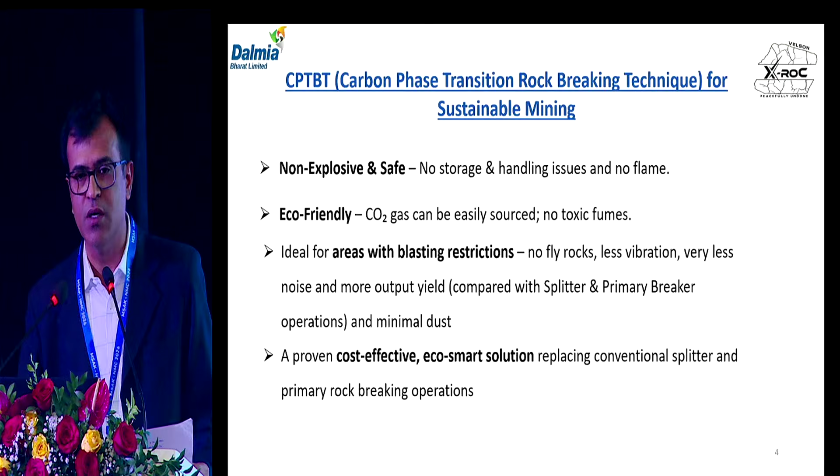So this technique offers a lot of key advantages, including enhanced safety, reduced environmental impact, precise and controlled rock fracturing. This can be used in sensitive areas like construction sites, tunnels, mines near highways, railways, wherever blasting is difficult and not permissible. So we have conducted a scientific study in Kallakudi limestone mines. Why we chose Kallakudi limestone mines? Because this mine is situated near National Highway 81, and there are a lot of villages surrounding the mine. So along with our CIMFR team, we have done this scientific study in Kallakudi mines.

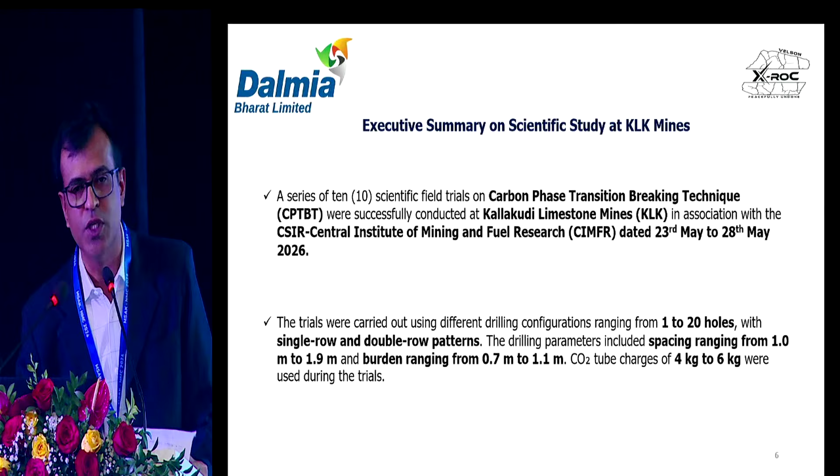We have conducted a series of 10 trials. They arrived on 23rd May to 28th May. During this study, we conducted different configuration parameters, including drilling: single row pattern, double row pattern, with holes ranging from 1 hole to 20 holes. The spacing ranged from 1 meter to 1.9 meter, and the burden ranged from 0.7 to 1.1 meter. The CO2 filled in each tube ranges from 4 kg to 6 kg. This principle will be later explained by my accompanying Mr. Raghuram.

So the ground vibration: normally when we do conventional blasting, we measure one or two ground vibrations with the monitor. But our CIMFR team installed around 7 monitoring stations in all directions, including top and bottom of the face. The peak particle velocity at 150 meters is 0.783 mm per second. For the distance 25 meters to 50 meters, the PPV is less than 5 mm per second, which is the safe limit.

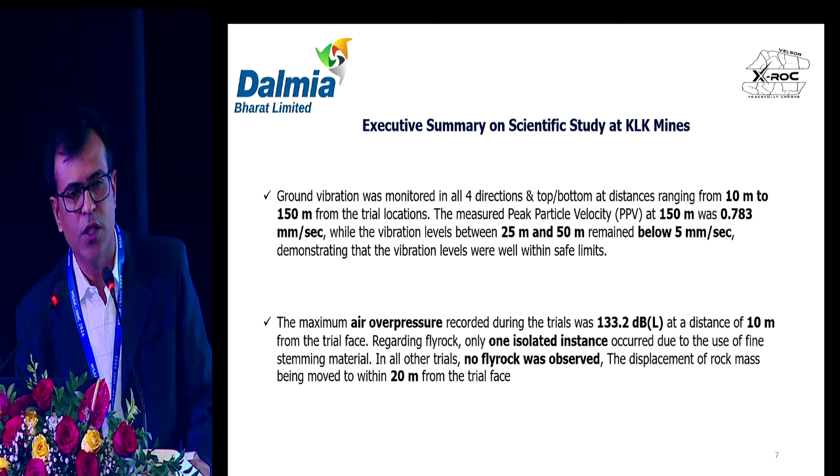And the air overpressure during the trials was a maximum of 133.2 decibels at a distance of 10 meters from the trial face. There was not much fly rock observed, but in one trial there was fly rock, because we conducted the worst scenarios in all the trials. So displacement from the trial face is 10 to 20 meters only. The rock which moved from the face is maximum 20 meters only.

So we have conducted the CO2 concentration analysis also. After the trial, 8 to 20 minutes, the range was 0.01% to 0.42% during the trials. There was no oxygen deficiency all along the faces. So based on this observation and monitoring data, the scientific analysis carried out by CIMFR shows it is very safe and can be implemented in all the mines with sensitive areas.

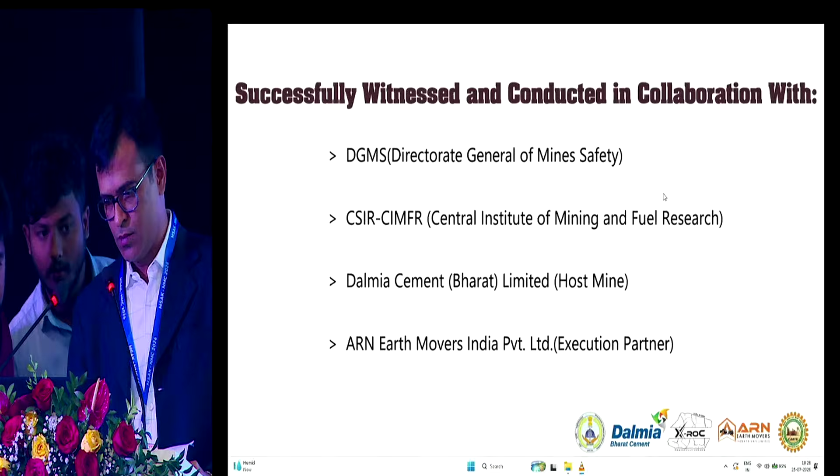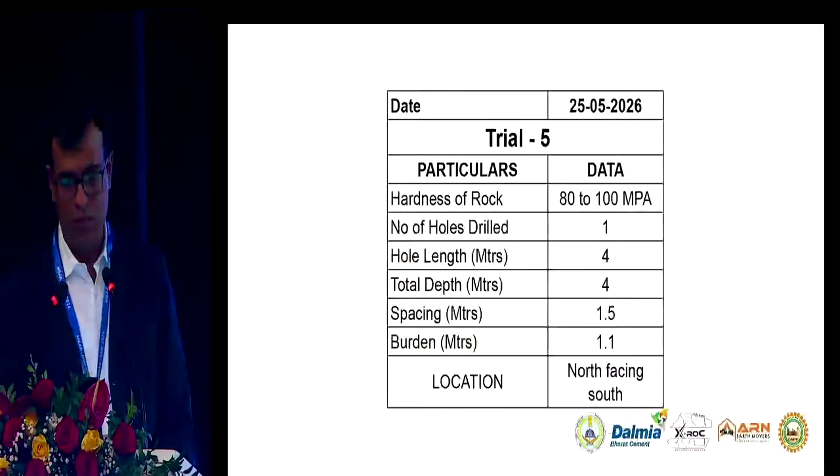India's mining sector is transitioning toward a safer, more sustainable future. For the first time in the nation's history, the carbon phase transition rock breaking technique, CPTBT... Greetings from Velson X-ROC. India's mining sector is transitioning toward a... A comprehensive series of 10 rigorous trials was executed, ensuring operational safety and performance criteria. Conducted at the Kallakudi limestone mines at Dalmiapuram, Tamil Nadu, under the evaluation and presence of DGMS and CSIR Central Institute of Mining and Fuel Research scientists. This milestone initiative was made possible through the strategic collaboration of Dalmia Cement Bharat Limited, DGMS, Central Institute of Mining and Fuel Research, and ARN Earth Movers India Private Limited. As mining boundaries advance, CPTBT stands as the ultimate non-explosive solution to eliminating fly rock and ground vibration risks. Velson X-ROC is proud to spearhead this sustainable leap toward absolute mining safety in the country. Special thanks to Directorate General of Mines Safety, DGMS, CSIR Central Institute of Mining and Fuel Research, CIMFR, Dalmia Cements, and ARN Earth Movers India Private Limited.

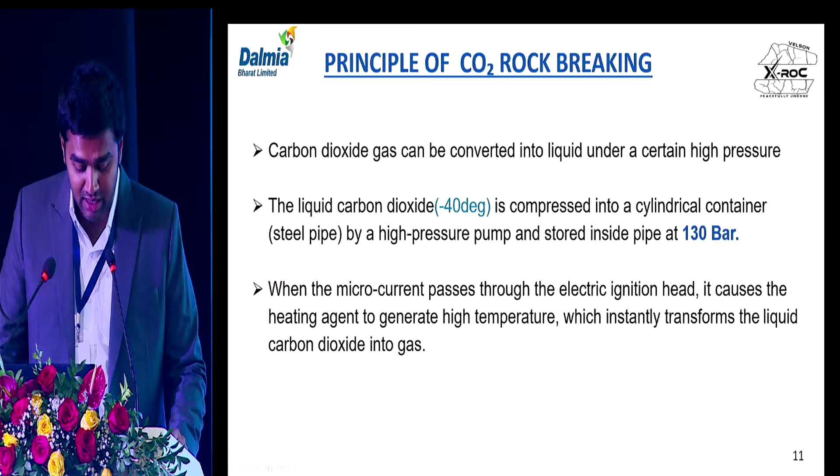So the basic principle of how CO2 breaking works is through liquid carbon dioxide. At its heart, the carbon phase transition rock breaking technique revolves around one simple motto: harnessing the power of CO2 phase transition to break rocks silently and sustainably. First, the liquid carbon dioxide, at around minus 40 degrees Celsius, is compressed into a high-strength cylindrical steel pipe from a storage cylinder. The steel pipe is made of 42 grade chromium, molybdenum, manganese, and other alloys.

Inside the pipe sits a heating element. The heating element acts as an initiator, which initiates the phase change of carbon dioxide from liquid form into gaseous form. During this transition, an enormous amount of pressure is released, along with a cracking mechanism that we use to break the rocks.

The liquid CO2 is filled inside the steel pipes at around 130 bar, which is otherwise 13 megapascal, through a reciprocating pump, especially for filling this liquid carbon dioxide.

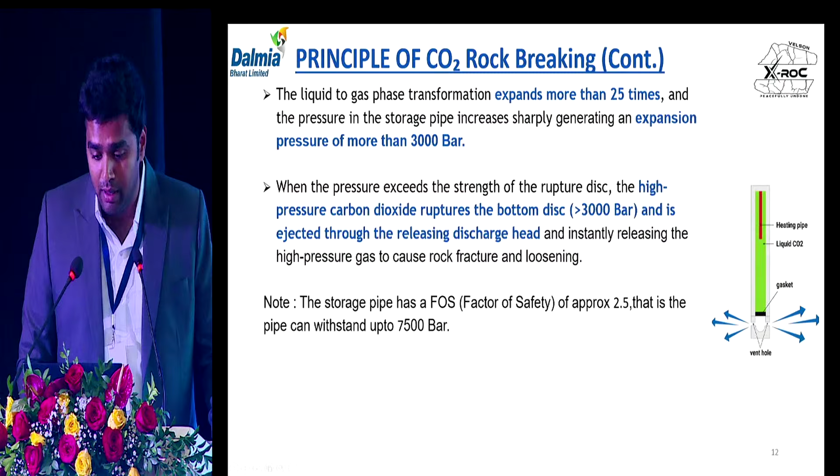So the factor of safety of the steel pipe is 2.5 times, that it can withstand 7,500 bar, whereas your breaking mechanism just requires 3,000 bar. And the process stages involved in CPTBT. As in other processes, likewise for normal blasting, you drill the holes. The drilling hole is around 140 mm and you fill the carbon dioxide into the steel pipes. Usually, as Mr. Johnson already mentioned, each pipe can accommodate around 4 kgs to 6 kgs of liquid CO2.

And then transport the pipe to the mining bench or the mining area where you need to have this process started. And you insert the pipes into each of the holes, either in a straight line pattern or a staggered pattern. And then you have to do stemming as you do it in other blasting cultures and connect in series form. And then we initiate the process for phase transition.

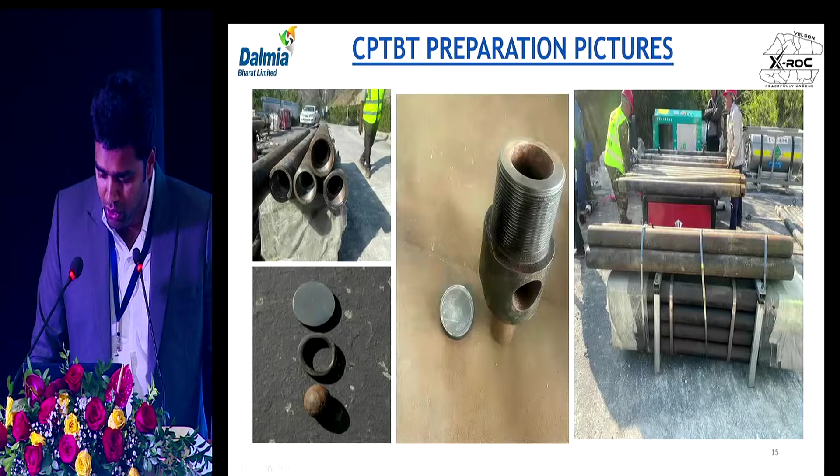These are some of the images that we have got here. The steel pipe, as I mentioned, has a thickness of around 20 mm, and the rupture disc has a thickness of around 10 mm, which is of mild steel. And to your right, you can see the heating pipe that initiates this entire process of phase change from liquid to gaseous form.

These are some of the photos that we took during the preparation and execution of this trial. So the preparation shed is where you prepare all the steel pipes and you fill the CO2 into it and repair the pipes in case it's bent or needs some repairing works.

And the technical and operational specifications consist of the entire kit, not only the steel pipes and the initiator, but also liquid storage tank, liquid carbon dioxide filling machine, which is a reciprocating pump, as I already mentioned, and a table, rock breaking pipes, heating pipes, air compressor and wrench to tighten both the ends of the pipe after everything is inserted and ready for filling. And you also have multimeter initiator and also a pipe straightener where you can straighten the pipe in case during the recovery the pipe is prone to some damages.

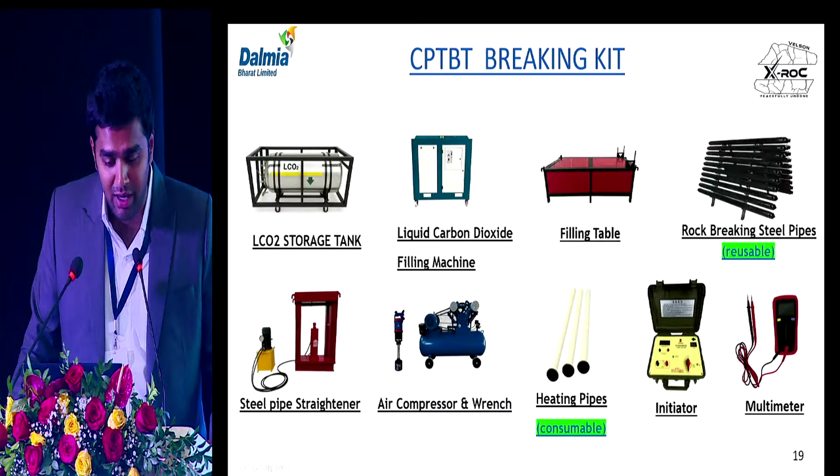And this is with respect to how much is the fuel emission and how much is the production output that you get when compared to primary rock breaking, especially the study that we have taken in Dalmia Cements Bharat Limited, Tamil Nadu. So putting all the numbers together, we came across 43% of fuel savings, and the reason as to why we have the savings here is through the breakers. The amount of breakers that you use when compared to a primary breaking or a splitter breaking is significantly reduced here because the initial fissures on the rock are already being created through this CPTBT technique.

And when compared to CO2, as it's directly proportional to the machineries involved, we have 39% less CO2 when compared to the primary breaking and splitter operations to extract the rock. Which means it also saved 2 tons of CO2 every day for 3,000 tons of rock processed.

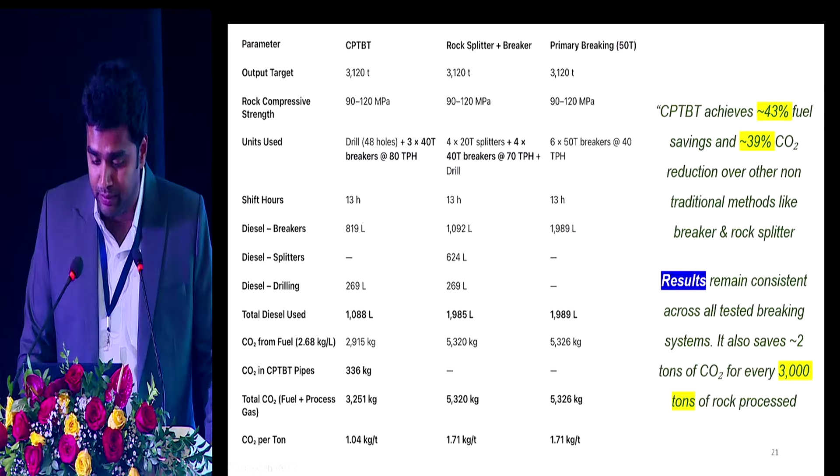We have also collaborated with CIMFR under the aegis of DGMS. From CIMFR, we have had around 7 scientists visiting Dalmia Cements Bharat Limited, and through rigorous trials and brainstorming sessions we had with them, we had to put the pipes and trials in a very extensive manner in such a way that extreme conditions have been accounted for. So this marks India's first scientific study combined with CIMFR under the aegis of DGMS, and we are also awaiting the report from CIMFR as of now.

So this transitions as a new mining method as long as we need to have mining done in very sensitive areas, especially near to habitations and infrastructures.

So this technology has already been implemented, trialed and tested in Dalmia Cements Bharat Limited, and it's been found successful there. And also in terms of volume, in terms of safety, and in terms of other parameters that they needed, it was found suitable and safe there.

And we are awaiting a report from CIMFR, after which I take this opportunity to express our deepest gratitude and respect to the Directorate General of Mines Safety. We are immensely thankful to the DGMS for granting us a trial study for this novel technique for the first time in the country, done in association with Dalmia Cements Bharat Limited. And I also wish to thank Dalmia Cements for providing us a platform at their mines for this maiden technique and to do an extensive study with all the facilities in their mines.

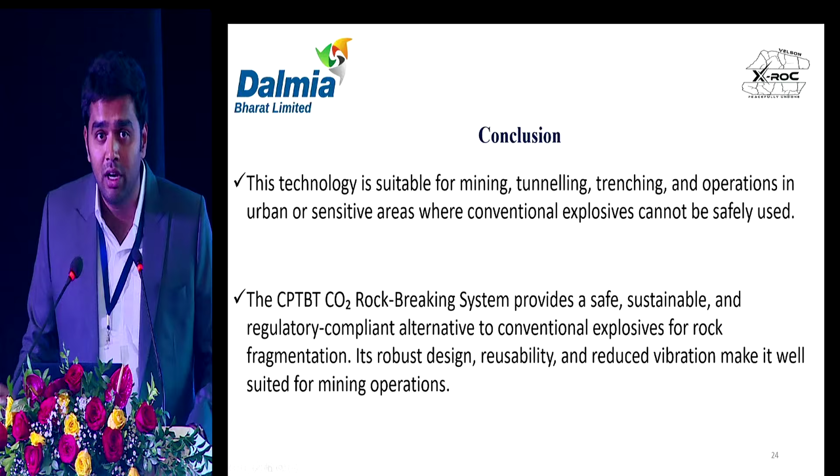This is all I've got for today, and thank you very much. Open to the conclave for any questions or discussions. Thank you, Raghuram. This is a new technology introduced, I think. Yeah. And if there are any questions, we can take one or two. Sorry, sir?

What is the safe distance, sir? Normally, when you undertake blasting, what is the safe distance you can assure for human habitation or roads or other things? So when it comes to vibration, within 50 to 100 meters, CIMFR scientists have recorded a vibration of 3.5 to 4 millimeters per second. So up to 100 meters, below 100 meters, we can do. Absolutely, sir. Safely. Right. That is the main motto of this.

And what is the fly rock distance, how much? So fly rock distance, as you have seen on the video, we have done only with the extreme conditions possible because we have reduced the burden and spacing. Okay, with that condition, what is it? 10 meters, sir. 10 to 20 meters is what we observed, towards the front face. Very good, very good. Thank you, thank you.

What is the commercial viability compared to conventional explosives in the present scenario? Sir, absolutely. When compared to conventional explosives, this is going to be more expensive, because the cheapest option right now is commercial explosives. But this is going to be used only in very sensitive areas. I understand, where fly rock control is required. Yeah, absolutely. Maybe how many times the commercial, twice or thrice? It should be 20% more from what we studied. 20% more. Okay, that's fine. Yes.

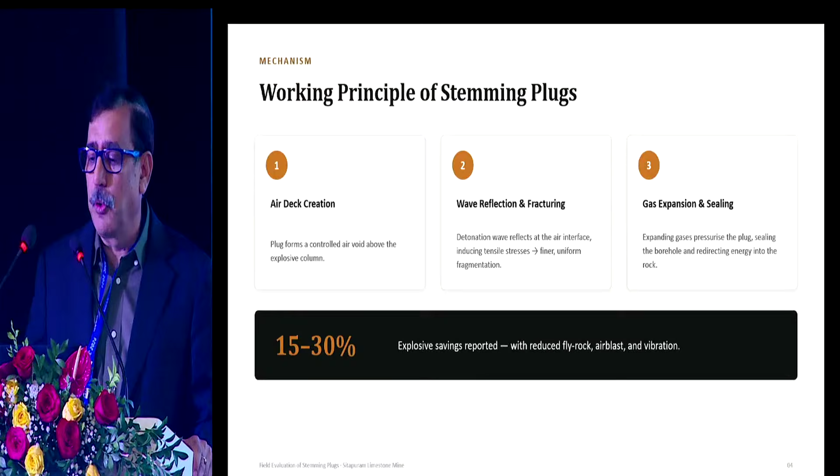The working principle is very simple. You create an air deck, and because you are creating an air deck, the compressive wave which is formed when you detonate explosives gets reflected and becomes a tension wave, and most of the rocks are poor in tension compared to compression, so the fragmentation improves and gas expansion happens, and this gas results in better fragmentation.

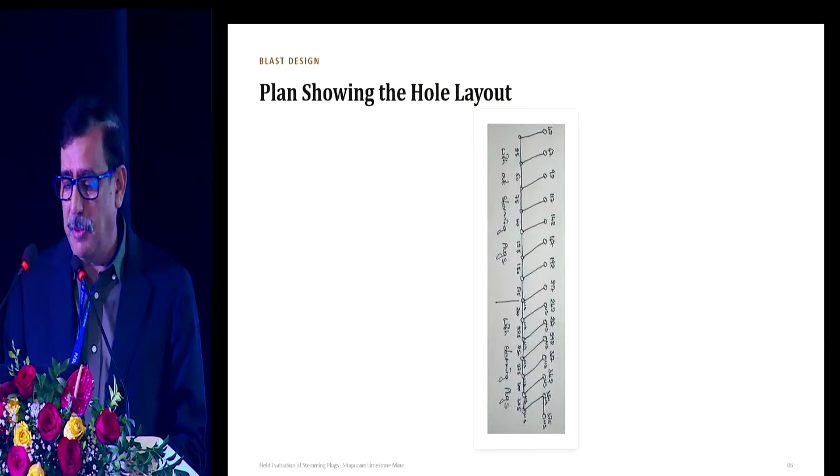So this is one of the case studies where we tried in Sitapuram mine of Zuari Cements Limited. This is in Suryapet district of Telangana. I'm sorry for this. So half the face we drilled and blasted with what we normally used, and in half the face we used stemming plugs. So this is how stemming plugs are used. We created an air deck of around 1 meter. Just put the stemming plug on the top, insert it through a stemming pole, and that's it.

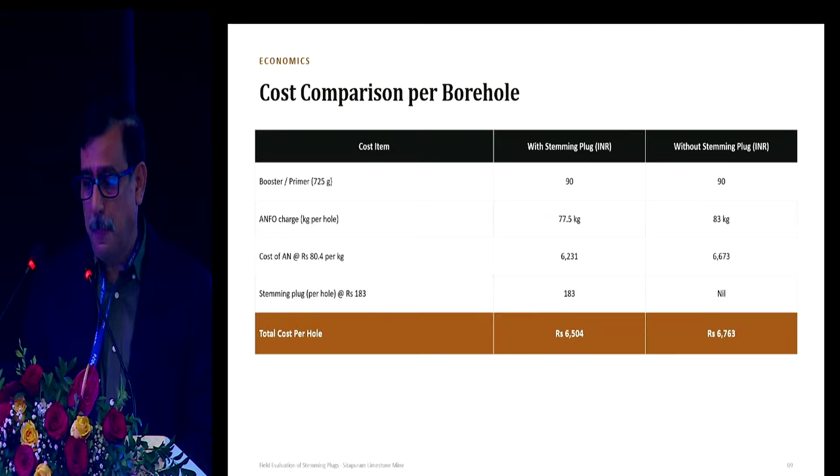As far as cost is concerned, the stemming plug cost around 183 rupees. We found that per hole, we have saved some money, resulting in a saving of, assuming a density of 2.5, around 1 rupee 47 paisa per cubic meter, and at a density of 2.5 grams per cc, around 0.59 rupees per ton.

And this is accompanied with good throw, good fragmentation. These are the primary readings. We have started selling this product, trying it only in the last 2-3 months, and we feel, and research also proves, that there is scope for saving up to 30%. But here, the saving is around 10%.

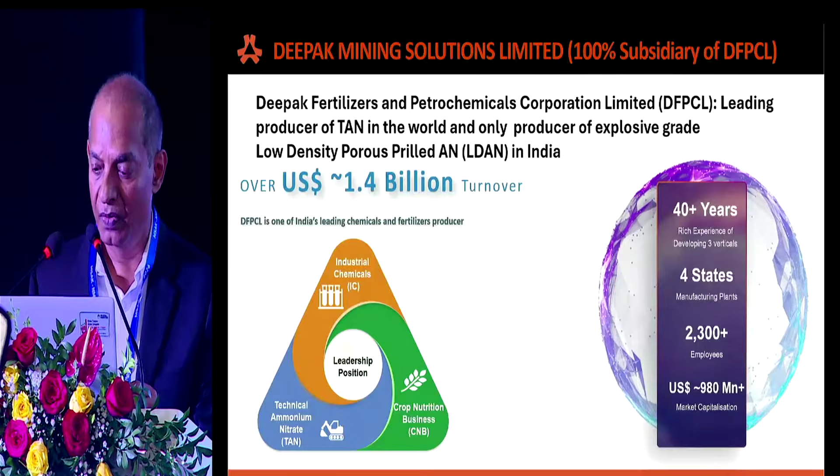The uniqueness of our company is we are also offering solutions. We believe in hand holding. We just don't supply product. We want to stand by, join hands, identify the issues a mining company has, and then work together, collaborate with them, and try to resolve the issues, share the details, share the technology and the experience with them. And the end goal is definitely production improvement, productivity improvement.

So you can see the entire chain here at the top. We all know that in any mining there are two main activities, upstream and downstream. Upstream activities mean the main two activities are drilling and blasting. Under downstream, the rest of the activity comes: load and haul, crushing, and then beneficiation and other things come after that. So the left picture shows the tools, the technology, the things we do to control these two activities, drilling and blasting. We have the expertise and full control on these two activities. The impact of these upstream activities on downstream activities is huge. We'll show you in the next slide a comparative of the percentage, the cost involved there in the entire value chain.

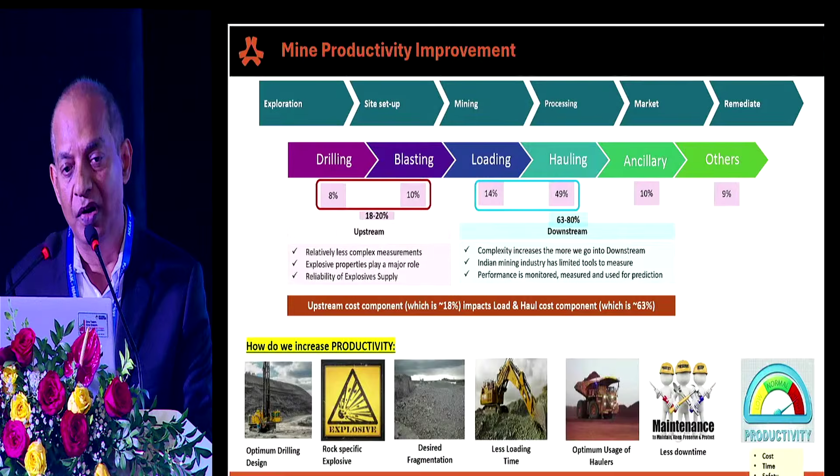We can optimize drilling design, use rock-specific explosive loading, and design charging rules based on that. By doing other things like timing, and using some AI tools for prediction, we can see the downstream improvement. We can also track that and show you the results. We'll talk about more details in a couple of the next slides.

A little bit on ANFO, it's nothing new, we all know, we are all mining engineers, we understand what ANFO is. The benefits are we can produce a higher powder factor, lower the cost, and improve the drill yield. Because of the gas energy, we can have better fragmentation. Because of the lower density, we can have better control on vibration. And because of the lower density too, the charge distribution in the hole is better than any other explosives, which results in better fragmentation.

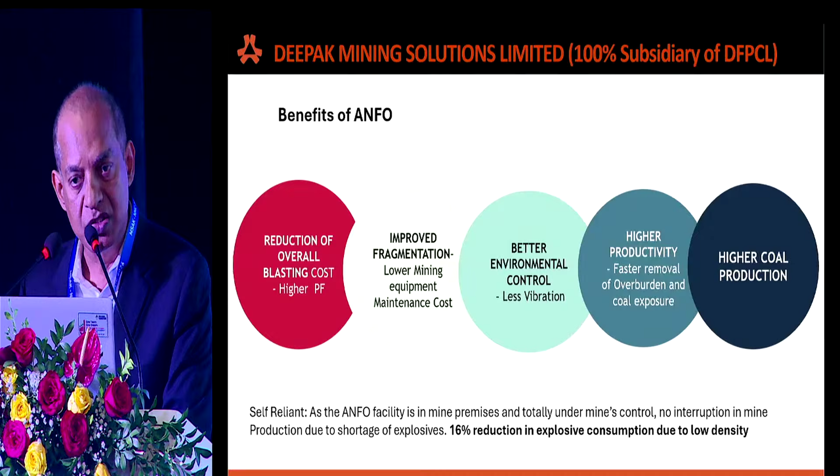For any blasting, there are two or three variables that are very important: the charge distribution, the confinement, and the bench geometry, along with all the QA/QC work. It helps if you use the lower density product, because for the same kilograms put into the hole, the charge distribution gets better.

This is one of the case studies I'm going to share with you. A very interesting site - one of the Ultratech cement limestone mines had some issues. The top benches were producing a lot of boulders, while at the same time the bottom benches were overblasted, producing more fines. So they had issues to control because of the overblasting. There was also an issue of ore dilution, which was causing a lot of time invested in segregating the ore and was affecting the overall productivity of the mine site. That was the main issue.

Our team got engaged with them and worked with them. We spent some time identifying their practices and then did some trials with their consent. We made recommendations to change the design parameters, using AI-based software to simulate the blasting scenarios by changing the design parameters. We were able to control the dilution and improve productivity by 32%. We'll show you in the next slide.

So that's what we did there - we improved the powder factor, and the drilling and blasting cost was also optimized. Ore dilution was controlled by doing all this exercise. We call it TCO, total cost of ownership. The concept is about controlling some of the key activities and evaluating the impact of that throughout the value chain.

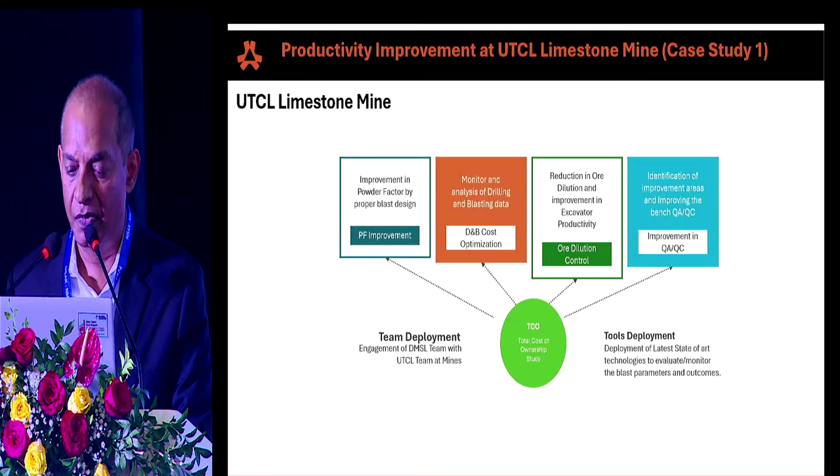So when they were blasting, the ore was getting mixed with the other material due to rock and material movement. The excavator was spending hours segregating that material before loading it into the dumpers to save the grade. By doing simulations, changing design parameters, and predicting the movement and throw of the blast, we were able to control the material movement and successfully segregate the material during the blast.

So you can see the muck pile was separated during the blast, and that helped improve the tons per hour of the excavator, because they were able to send the excavator right up to the high grade, and the material was filled into the dumper in very little time.

You can see the dumper fill time also improved, almost 30% time improvement there, and 16% productivity improvement by doing the optimized blast.

The idea is to explain that there is technology available in the market, in the industry. All we have to do is give it a try. I know the potential is there in our country. We have the smartest engineers in the world, I can tell you that.

But what I found is a little bit of a gap in the adoption of digitalization. I think it's happening, the concern is only the pace of that. It's not very fast, it has a lot of scope to improve. The Prime Minister's vision of an advanced country by 2047 is not too far, so we have to work now and decide how we can improve productivity by adopting technology.

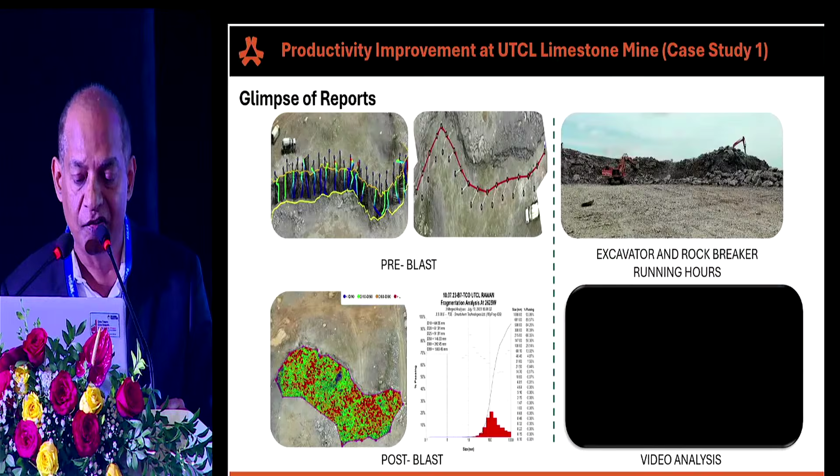So it's the same, more detailed information about drill yield improvement, powder factor improvement. Rock breaker hours were also reduced by reducing the boulder size. That's another exercise, a case study.

It's a very prestigious one, Navi Mumbai, the new international airport. We were also part of that development, and there was a lot of challenge. There was a deadline to achieve the material of spec size because they were using that material to do some construction work at the buildings nearby.

And the challenge was there was a limitation on vibration control because there was infrastructure close by, within 110 meters. The PPV restriction was to produce not more than 22 millimeters per second. Fragmentation to the spec was required, and fly rock was also a concern.

So we collaborated with the management, the local management there, and worked together, and with all the help of experience, knowledge, and technology, we were able to achieve the results.

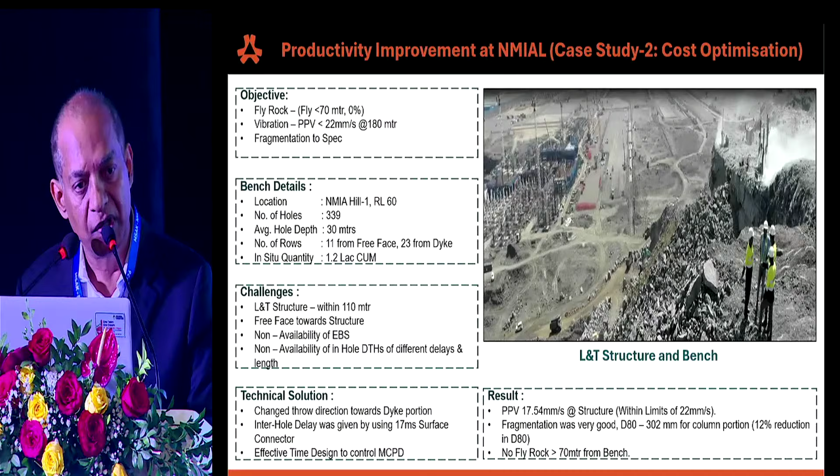The PPV was 17.5 millimeters per second at the structure where the point of concern was. Fragmentation improved by 12%. Oversize material was reduced by 12%. And fly rock was not beyond 70 meters, where the structure was located. So this is another study we did there.

Now we come to the actual topic. I did not want to spend much time on this because we all know it, it's available on the internet, everyone knows that. What is smart mining? What are the options there? So I will go quickly through those options and we'll discuss the challenges we have.

In layman's language, smart mining is just an intelligent connection between the physical data which is captured and stored in the field on the equipment, and that can be transferred with cloud-based technology to the offices, and the dashboard can be analyzed using industrial Internet of Things. That's the basic concept, but there's a lot of detail.

If you want to know more about it, feel free to connect with me, we'll explain more. Just a little bit of importance.

It enhances safety. I will go through the main points because of time crunch. I think safety can be enhanced by use of technology, by using remote drills, automated trucks. Operational efficiency can be improved by using this technology. It's more sustainable, it optimizes resource use and emission tracking to meet environmental regulations at the same time.

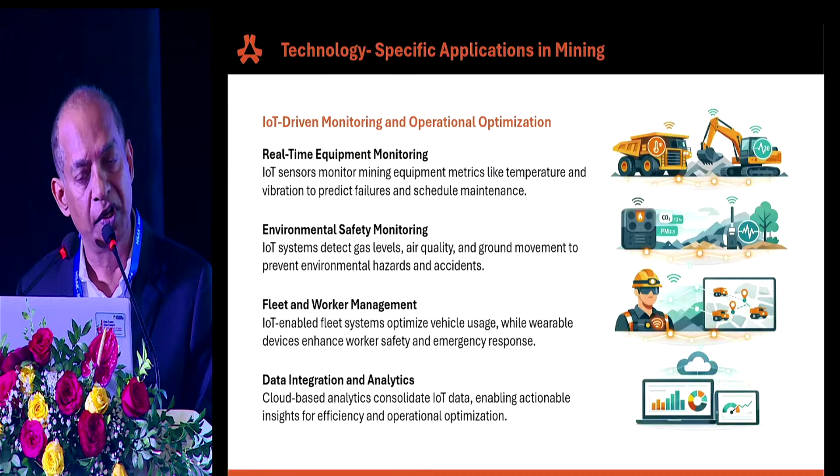Mining produces huge data every day. So data management is also a big challenge for any mining industry. But that can also be handled very accurately, very fast with the help of these technologies. It can also predict maintenance, a very important role for equipment, knowing the equipment downtime in advance. By doing predictive, preventive maintenance, you need to know when it is going to need maintenance. So you can predict the maintenance by monitoring the behavior of those equipments by installing some sensors.

And it can directly transfer the stress created on the equipment. So you can watch that, you can simulate the conditions and find out when it's going to fail, and you can take action.

Other AI-driven process optimization: intelligent control systems optimize mineral processing parameters. That's another application to the mining industry. NLP streamlines the administrative tasks, like text messages and audio messages can be directly converted into actionable items using NLP.

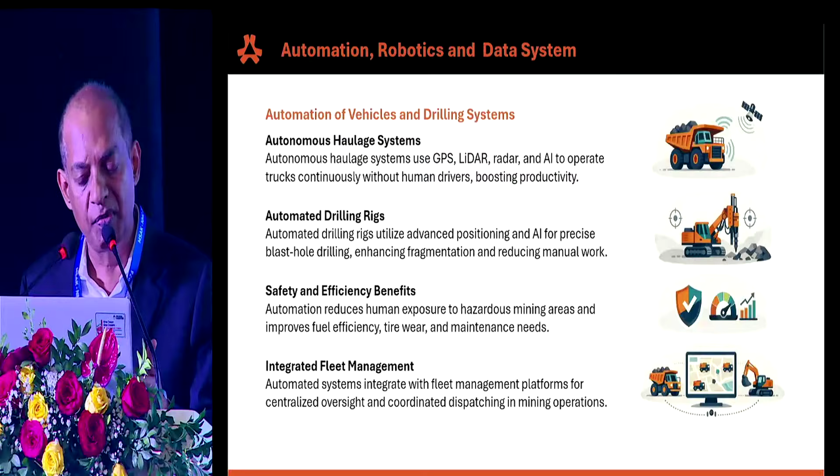Robotics are also getting attention nowadays, and companies are trying to use them in dangerous zones for inspection of the areas. The robots go there, take pictures, come back and provide the information, which can be analyzed in software. So that can be used for inspection.

Aerial drone surveys are very common. We are also doing it, but you can fly drones in inaccessible areas, get all the images, monitor the dump movement, monitor the wall movement, all those things can be done. Automated sampling and maintenance can also be done by robotics. Emergency response: remotely operated robots can address emergency situations. If a fall happens, we can send the robot to rescue the worker and do other things needed.

Comprehensive data collection can be done with the help of technology.

Sanjeev Kumar, another 2 minutes, please.

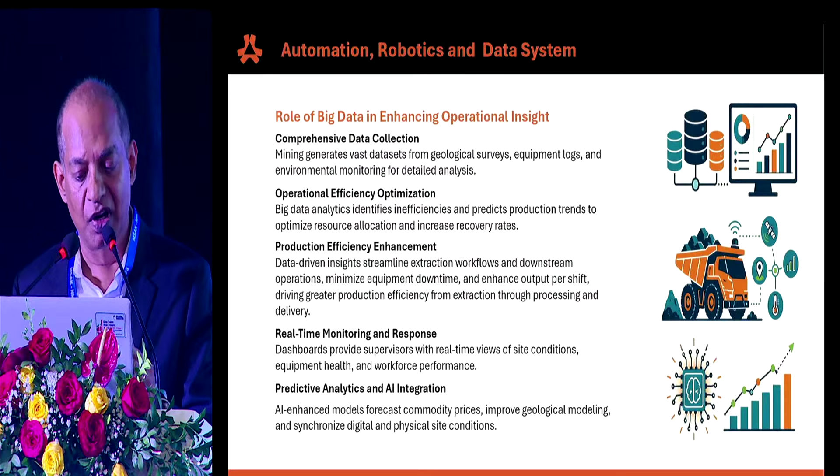Sorry, we'll finish soon. Operational efficiency optimization, production efficiency, real-time monitoring and response. Quickly, we go to the challenges. The big challenge is the high initial capital investment. That is definitely a challenge. But if there is an option, I don't know if the government can support that by giving some loans at low or zero interest for a couple of years, so the mining industry can use that money and invest it.

Because sometimes it's difficult to know the ROI, there is no clarity on the return on investment in the beginning. It will pay for itself in a couple of years, but it depends how much you want to spend. Another option is we can do some trials. You don't have to buy the whole technology, but you can do it in parts and see the results to justify the investment and then go for a bigger investment.

Limited digital infrastructure is another challenge. We don't have a robust network. I think we have to build that so that all this technology can work. The mine sites are remotely located, so that's one of the challenges. Workforce skill gaps are there.

We have to train our people, make them aware of the value, and there is a psychological fear of losing jobs by doing this. But I think we should use it as a tool. It cannot replace the human brain, the decision making. It can only speed up your processing. You can improve the accuracy. So there is that fear. We have to just overcome that and prepare our people to adopt and use it.

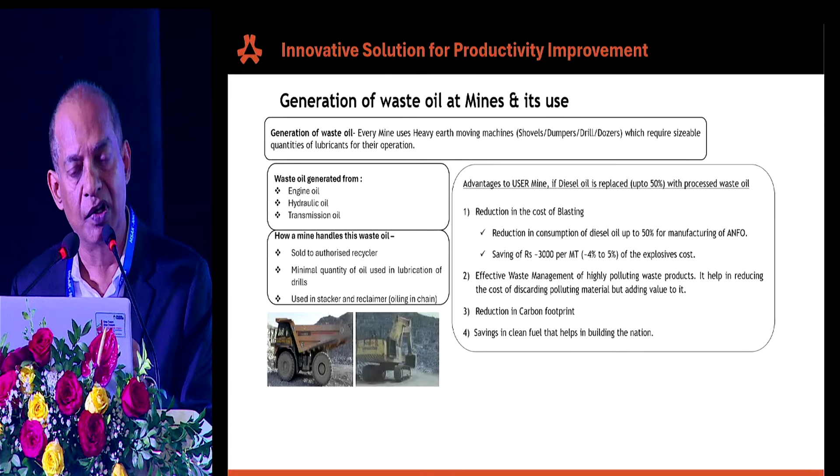So this machine has two chambers. The used oil can be mixed with the fresh diesel, and it's usable to produce the required energy in the ANFO.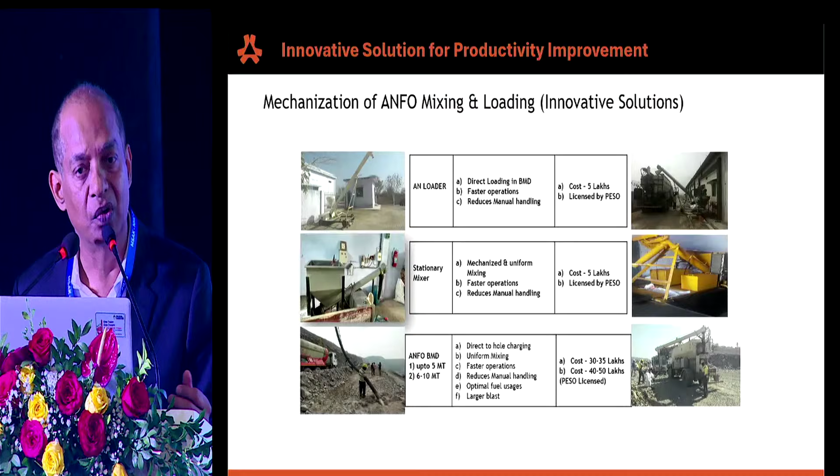Some of the other things we can provide: the AN loaders can help to speed up the loading process into the BMD. A stationary mixer will also help, and we provide our explosive truck so that the ANFO can be directly charged into the holes.

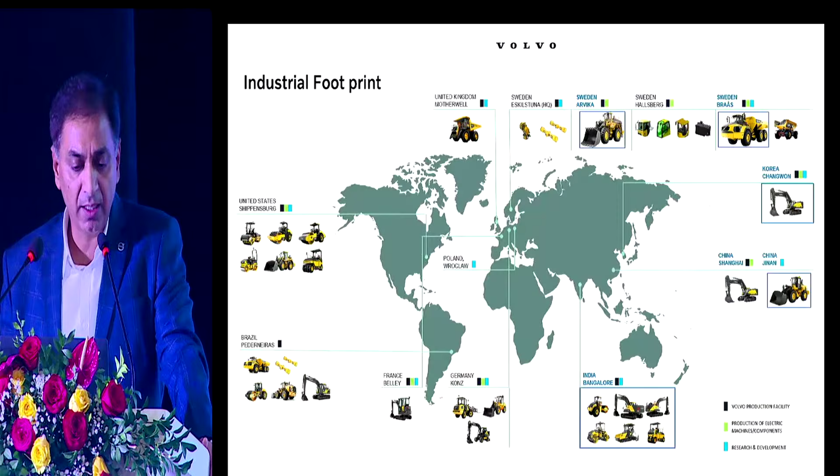So that was a very small glimpse of the fact that we care about safety when it comes to any construction or mining sites. This is the industrial footprint that we have across the globe. And of course, Bangalore in India is one of them. We have a large production facility here for excavators, a facility for Volvo trucks, and a facility for Volvo buses.

And we are proud to say that Bangalore, India is also one of the key R&D centers for the Volvo Group. And we are expanding soon. We are doubling our capacity in the next 2 to 3 years. This is where we do our manufacturing. We started India operations, as I said, in the latter half of the previous century.

And we also heard about people talking about operator trainings and things like that. We have invested in a world-class facility, which we call the Volvo Construction Equipment Customer Center. This facility is in Hoskote in Bangalore. And we do a lot of trainings. We have invested in simulators here. We have a simulator on wheels, which we take to the sites. That is more about getting hands-on for the operators and talking more about safety and things like that.

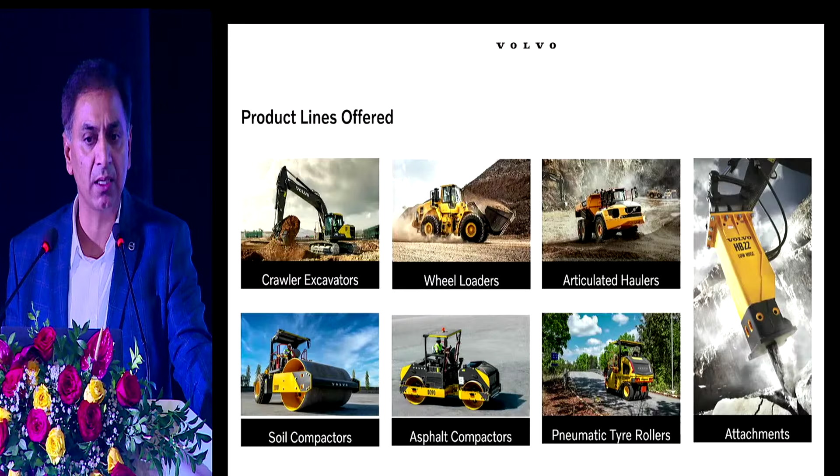This is our presence in India. We have 18 to 20,000 machines currently working in the country. I'm talking about the machines, not the trucks as of now. We have 21 domestic dealers and as many as 1,100 service and salesmen across the country through our dealerships. And the product lines that we offer in the country today range from excavators to wheel loaders, artic haulers, and road making machinery, including the attachments and the special application solutions that we offer on these machines as the base carriers.

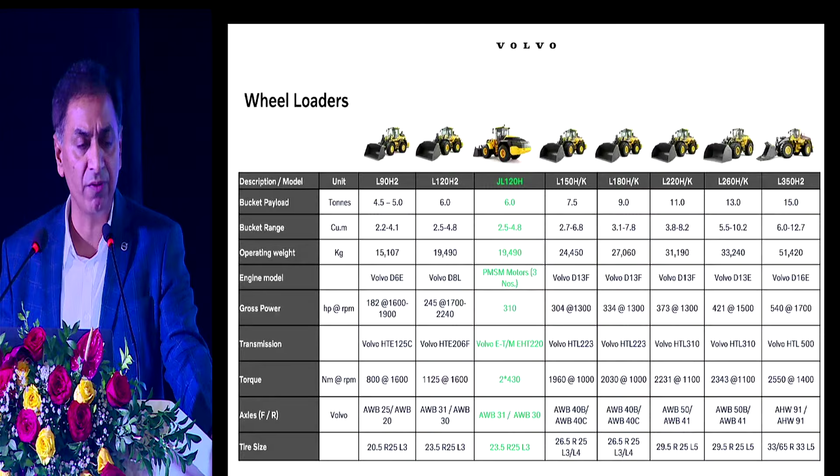When it comes to excavators, what we offer to the country today is from 20-ton to 90-ton excavators, which are used primarily in construction, heavy infrastructure, or mining applications. When it comes to wheel loaders, we are there from the 4-ton to the 15-ton wheel loaders, be it face loading or rehandling of materials. And in the mining segment, when it comes to this range of equipment, we lead in this country.

Of course, contractors are our largest buyers, but we also deal with Coal India subsidiaries, where we have supplied a lot of this equipment. And these are the articulated haulers, from 25 to 55 tons is what we provide. In the next slides, my colleague Deepak will be briefing you on the technology.

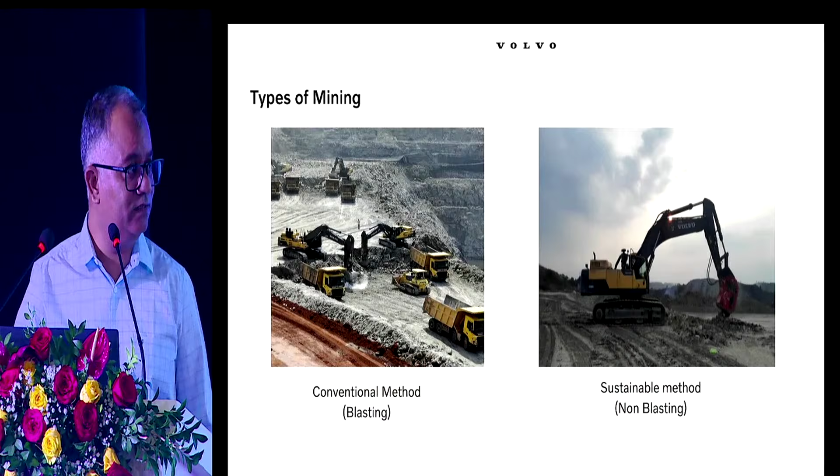Good morning, everyone, once again. I will not take much time. My friends have already explained the types of mining in the previous presentations: conventional and sustainable mining, blasting and non-blasting. For non-blasting, if you see the customer challenges: blasting restrictions, safety risks and vibrations, noise complaints, environmental challenges, and mining closer to habitats or national highways, as explained by my friends.

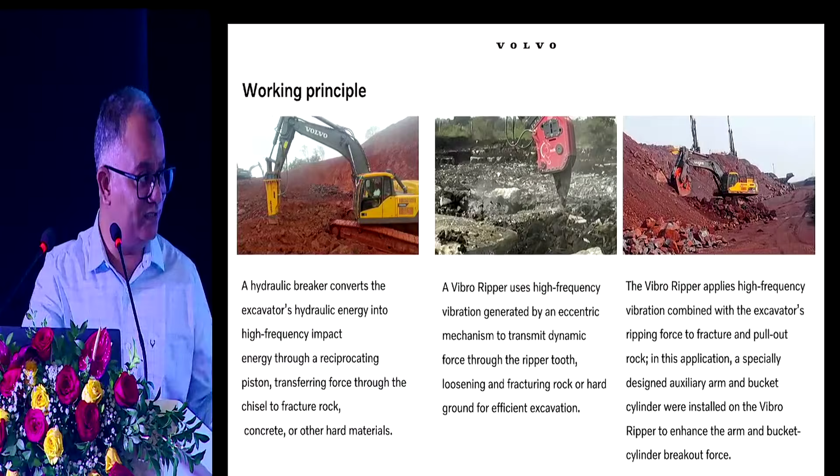The current solutions available in the market are a breaker, a vibro ripper, and the one which we have worked out is the BRMC 85. That's the brand which we are taking forward. Coming to the working principle of these three different solutions, I will not go through the text, I will just run the video. You can hear the sound of the breaker, but the vibro ripper you can hardly hear. It works at around 50 decibels or less, so you can operate near offices or in housing complexes too, apart from mining.

Now, suggested applications for this solution, because we have multiple solutions. How do you select which attachment or solution is applicable for you? Based on the RQI, the rock quality index, you can easily select which attachment is good for your site.

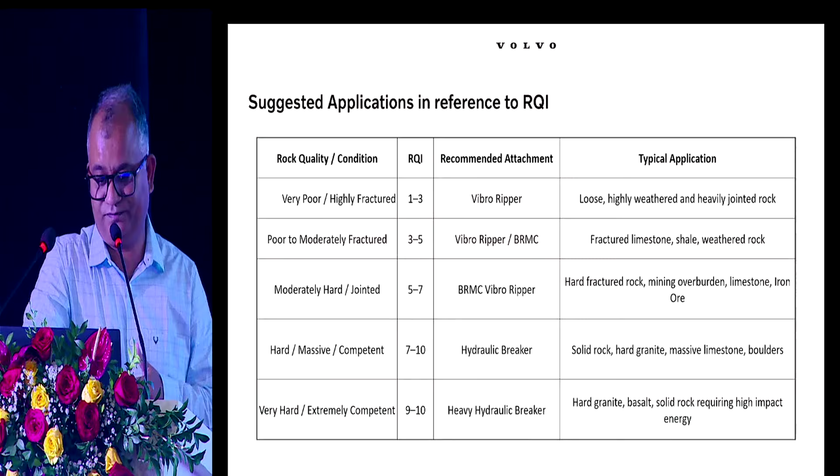The BRMC 85 is actually a combination of a vibro ripper and a specially designed arm, which gives roughly 56% higher ripping force compared to the standard ripper. We have fitted an 85-ton class vibro ripper on a 50-ton class excavator, which gives us a lot of advantage. It is working in one of the iron ore mines in the eastern part of India, which we'll talk about in the coming slide.

So how is it creating value for customers? Its high frequency vibration fractures rock, so no explosives are required. It's a continuous operation, no need to stop the mining operations; currently it is working in continuous shifts. For the customer, it means safe operations near urban and sensitive zones, low noise and minimal ground vibration, and minimal effect on the mineral quality.

And on fuel consumption, as I mentioned, we have developed this attachment for a 50-ton class excavator, so we are able to save a lot of fuel compared to 85-ton class excavators, which further results in a low cost per ton.

Just to update you on the site where it is working in Tata Steel Joda East iron ore mines. So it has crossed around 1,800 hours, and it is very well appreciated by Tata Steel as well as the other contractors who have visited this site. So some of the data which I will talk about on the productivity: it is giving 200 to 250 TPH, with a fuel consumption of 27 to 29 liters per hour. So that's the site data we have. It works out to be somewhere around 60-65 rupees per ton from the customer perspective.

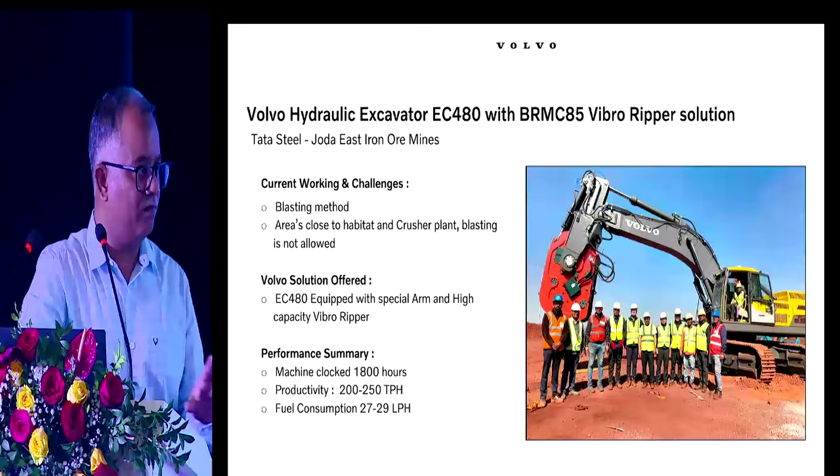So that's it from our side, sir. So if any questions. Thank you, Team Volvo. And sorry, we ran very fast because. No, only one question. We are running out of time. Yeah, no, you are still always speaking.

Hello, sir. Is it only workable in secondary blasting, or can even primary be done without blasting? Sir, it is basically for primary breaking, sir. Primary breaking. Yeah, it's for avoiding the primary blasting. Yes, sir. So, what will be the cost of that attachment you have shown? Sir, actually, including the excavator and attachment, it will be like 4.25 CR. 4.25 CR. Yeah. So, has it been tested in limestone mining?

Sir, actually, we have tested in iron ore. Iron ore happens to be, I will say, slightly harder material. So limestone, we are exploring actually; if we get an opportunity, maybe we can work together. Sir, we can give you permission for a demo. Can you make an arrangement for a demo? We can definitely, sir, we can definitely work. So limestone and dolomite both, if you can arrange a demo. There are hundreds of mine owners who are ready to buy this. Right. They will be happy to give a demo. Please move on to the next question.

Sir, my small question is, are you manufacturing any electrical machinery for underground mining? I don't think you are manufacturing electrically operated machinery, because for underground we need only electrical machinery. Okay, you know the answer also, then we will move on. No, but a small correction, sir. We have articulated haulers which can be converted to low-profile dump trucks, and we now have electrical machinery available. We have electrical excavators, a 50-ton grade electric excavator, which we have already got in India, in Bangalore itself. If you have the time, we invite you to visit our facility today, tomorrow, whenever it is convenient to you.

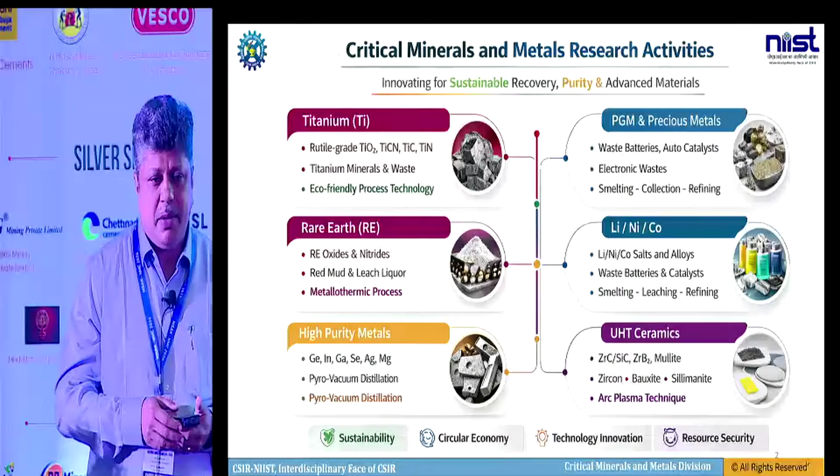And most of the battery materials or ceramics which we are working on are recycled materials.

Critical metals are now used for many of our EVs as well as semiconductors, where huge demand is going on. But all these metals and materials require purification. Without purification, you cannot use them for any of these applications. So we have the facilities for that.

I'll just touch upon the mineral sands, which is similar to mining places where you can find different types of sand. As you know, the beach where you see the black sand contains ilmenite and zircon, as well as rare earth minerals. Even in Teri sand, most of these minerals, titanium-based minerals, are there.

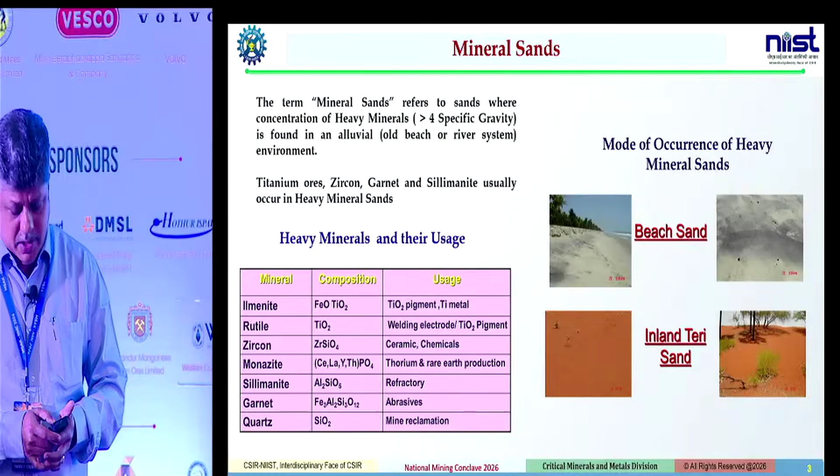But the issue is, when you want to extract the titanium oxide from these minerals, other impurities are also present. You have to remove these impurities by the advanced beneficiation technique.

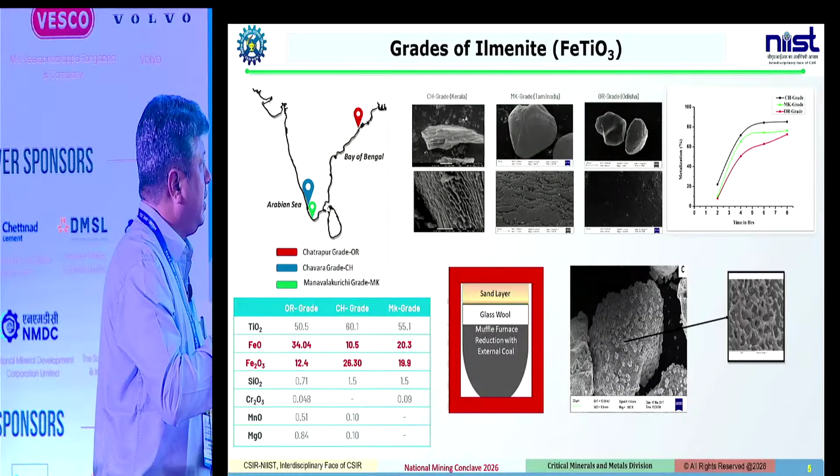I want to give you some in-depth understanding: if you look into any type of mineral or mineralogical structure, region-wise it is different based on moisture and atmospheric contents. Especially if you look into the iron oxide, FeO and Fe2O3, these are not impurities, but they have to be separated separately, then only you will get titanium oxide. And as you know, FeO is very difficult to separate out from the beach sand.

So we have developed a unique process approach on how to remove this FeO and Fe2O3. This is the overall flow sheet.

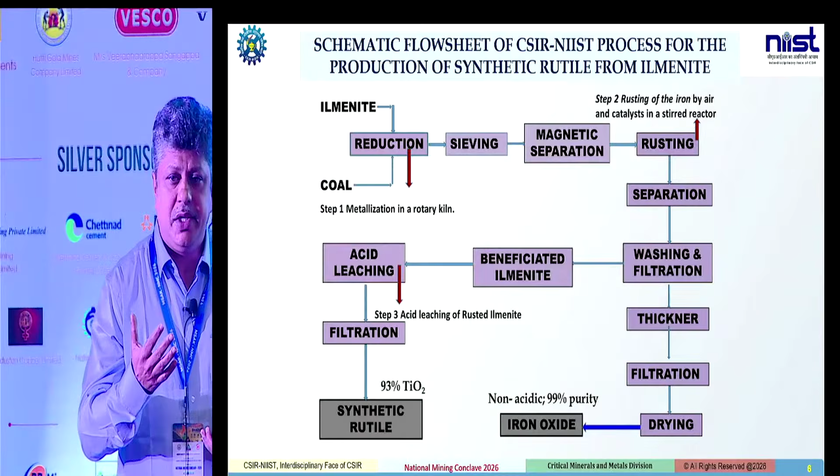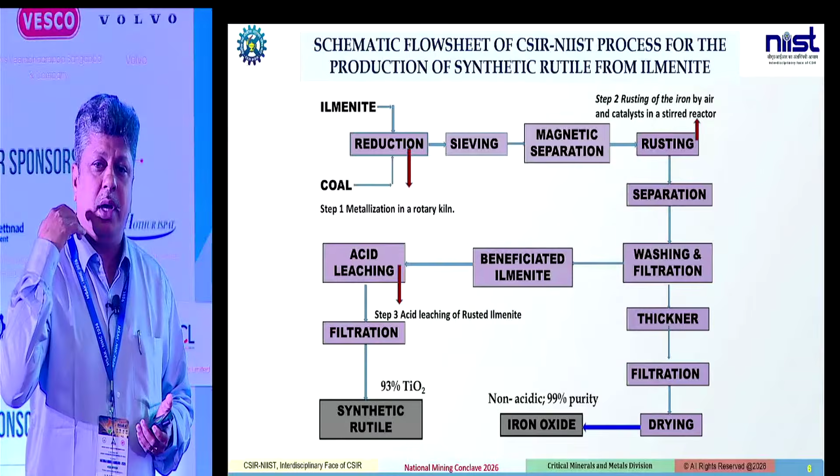Now the beneficiation, we can say physical beneficiation, usually goes as flotation, cyclone separator, or gravity separator. For whatever slimes or tailings where the concentrations are very less, there is another type where you have to go for chemical beneficiation or thermal beneficiation. It's not that you are going for complete use of chemicals like pyro or hydro type processing, but there will be a bit of temperature as well as mild chemicals required to enrich the rare earth minerals as well as the titanium.

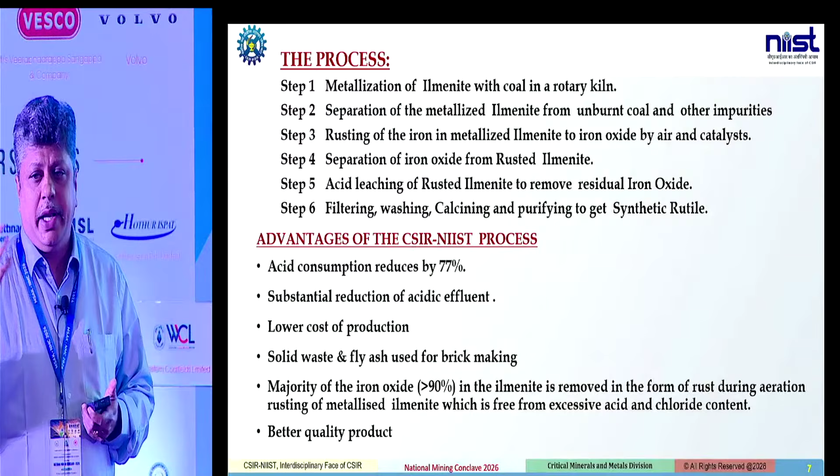I'll give you some of the things we have done differently from the industry. Especially for any type of extraction, the iron removal, the simplest way is you can use any acids, and the iron can be taken out as iron chloride or iron sulfate. But we have not gone that way.

So we have used another process called accelerated rusting, where we reduce the acid consumption by 77%. This is one of the important aspects when industry is processing - they should not generate acid waste from the process. So we can avoid producing acid waste by this type of process approach.

I want to explain how the science and mechanism plays here. If you look, FeTiO3 is a mineral as one compound. When we have controlled heat treatment or controlled thermal treatment, the titanium oxide will remain as the core and iron gets off the surface.

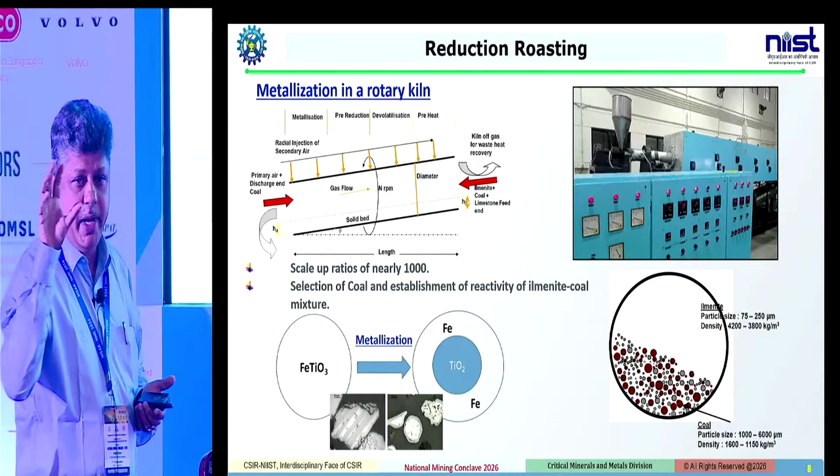So this way, wherever your tailings have nickel, chromium, manganese, or vanadium, you can control your roasting conditions, and when it is associated with iron, you can make it come separately on the surface. So you can easily separate it out by this approach.

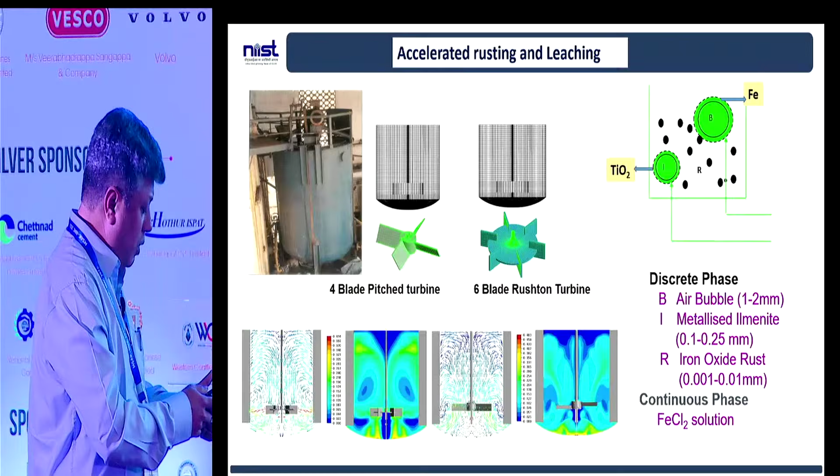We have another process - this is a very simple aeration rusting. There is no acid, only water has been consumed. I want to show you, when you look into this image, how this iron gets separated. With the help of aeration and applying these aeration conditions, it gets easily separated. The iron will be separated in the iron oxide precipitate form, and titanium will settle down. So in this process, there is no acid involved.

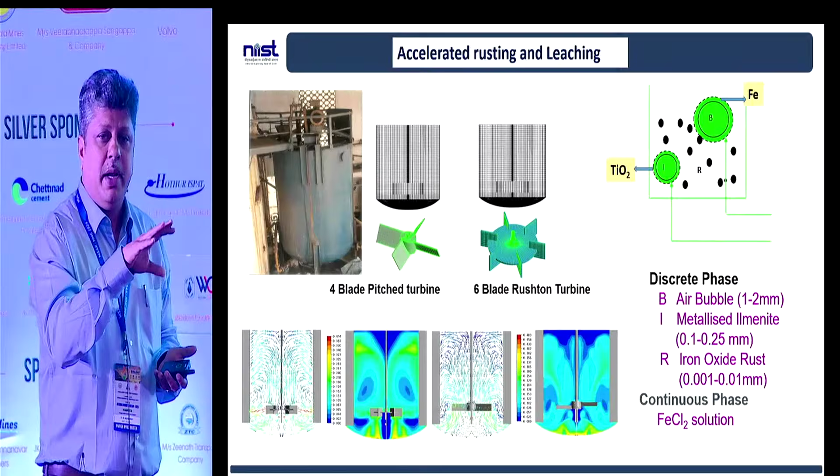There is only a mild thermal treatment. You can even enrich to 85% titanium oxide. You can see the starting material, which is titanium at 62, 63%, you can get to 85%, and especially a very less amount of iron will be present. It can easily go for any hydrometallurgical process.

And there is another process also we developed - it is a smelting process. The slag, especially from steel plant industries, is being produced. Even the slag has some important rare earth materials and metals present.

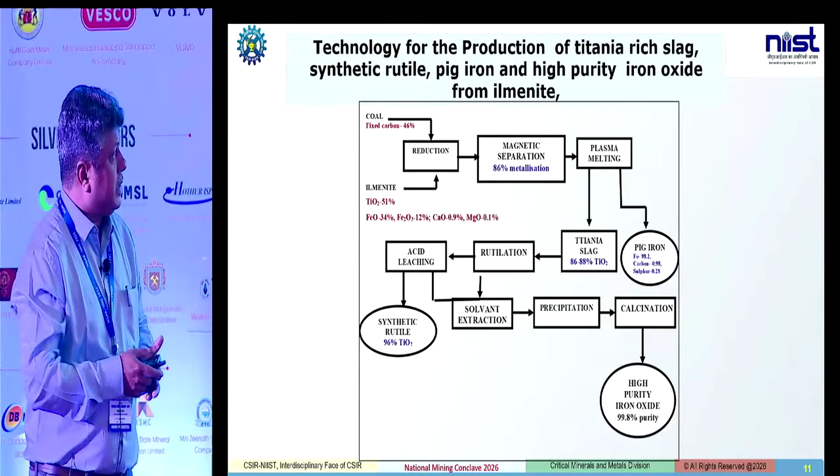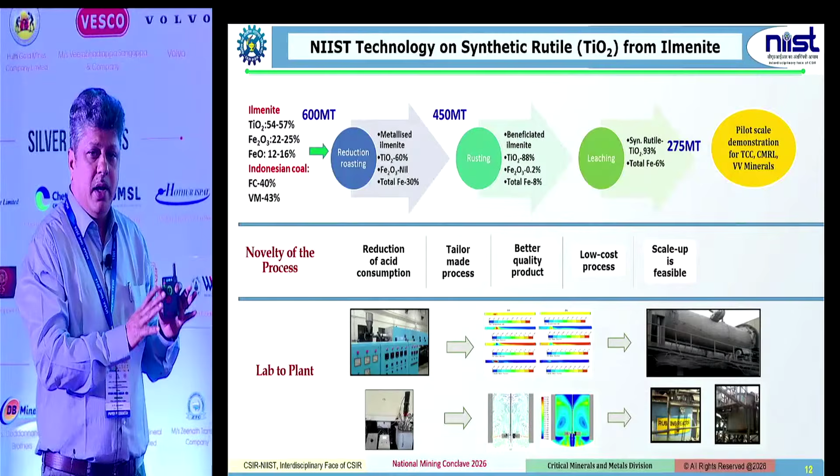So you can beneficiate using this type of approach where you can produce the individual rare earth oxides. This process, which we made at lab scale, is also demonstrated at pilot scale, even industrial scale, we have tested the conditions. This is one way where you can enrich the required material - titanium or any other nickel, chromium, manganese - from lower grade to a higher grade without much acid usage.

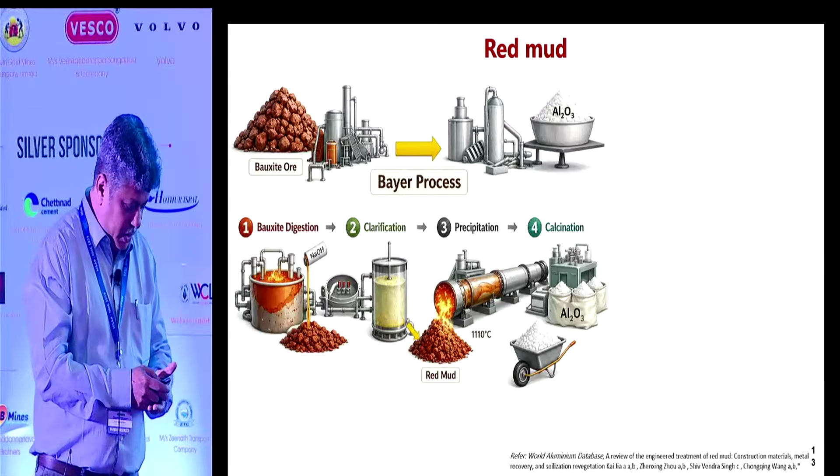I just want to show another example: red mud. We all know the alumina industry has one of the major problems of handling this red mud. We have good quality bauxite, so we are the largest producer of alumina, but the main problem is the handling of the red mud. At present, these red muds are stored in ponds near the plant, in the mining premises. For every 1 ton of alumina produced, 1.5 tons of red mud is generated.

Particularly in our country, we have a huge accumulation of red mud. This is an example where you can think of any sludges or dust fines generated in the same way - the process we develop for red mud can also be applicable to those.

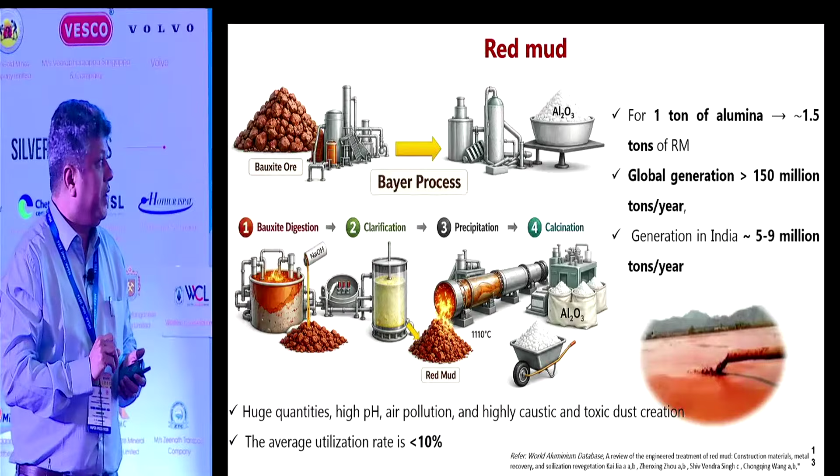Another problem is that red mud is highly caustic in nature. It has alkali, so it's very difficult to process and handle this red mud. As I said, regarding mining safety, there are a lot of incidents that happen when there is stockpiling of this type of tailings or sludges in different ways. Pond accidents have happened in many places - Brazil, China, Hungary and others.

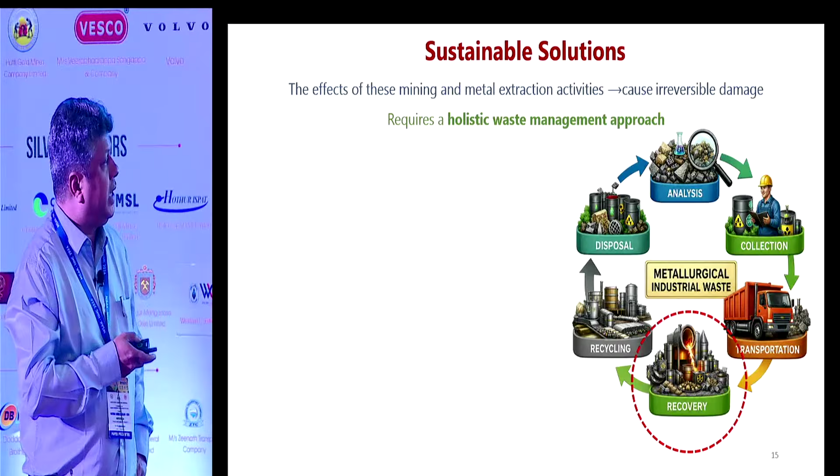We are the second world's largest producer of aluminum, and with that comes a lot of red mud, but there is no holistic approach to it. So what we looked into - red mud basically has a lot of iron present. But what we looked into is how we can recover whatever metals or material are present in the red mud. The metals we found in the red mud are not only iron - there is a good amount of titanium and also a good amount of rare earth metals present.

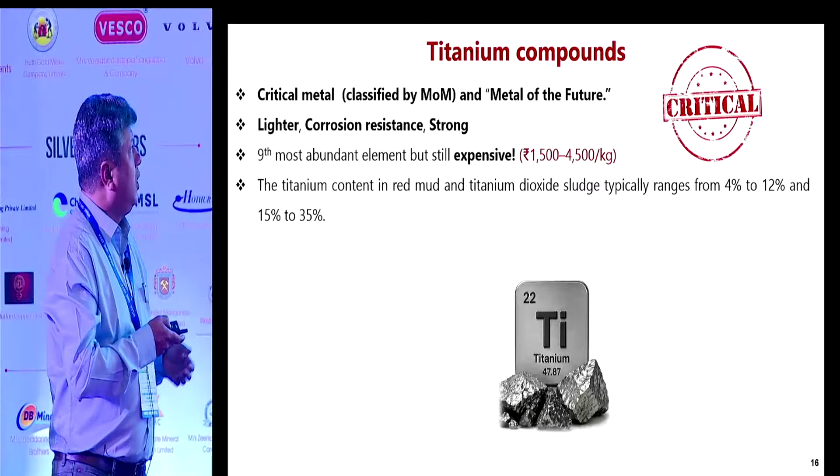Titanium is important because even though its concentration is low, you can see that titanium consumption is huge. Whatever way titanium is produced or enriched, it has good market value and many applications and markets. And another important one is rare earth.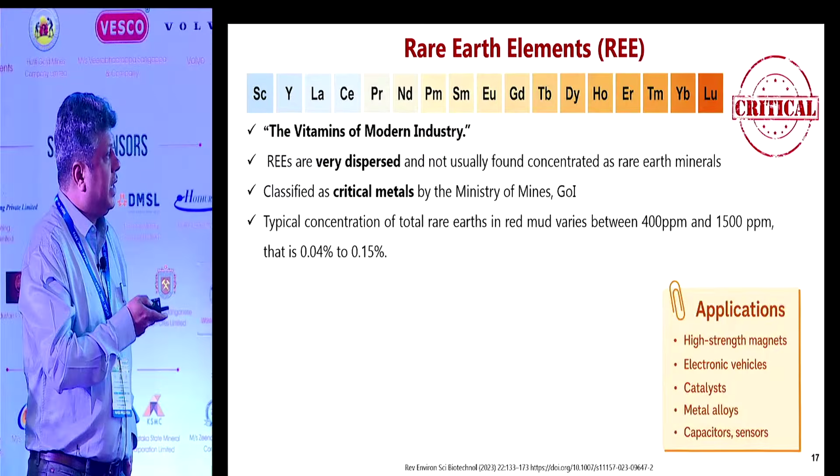In modern industry, you know rare earths are being used in many applications. Most of the rare earths we use, especially for magnets, EV vehicles and catalysts, are being imported, and we find them in the red mud. These rare earths are really very costly - even costlier than some rare metals, costlier than gold or other precious metals.

Because of that, even though rare earths are present at lower concentration in many of these slimes and sludges, why are they expensive? Because demand is more and there is supply restriction, and it's difficult to process and produce these rare earth metals. I'm just giving the glimpses - every year the consumption and requirement is going up.

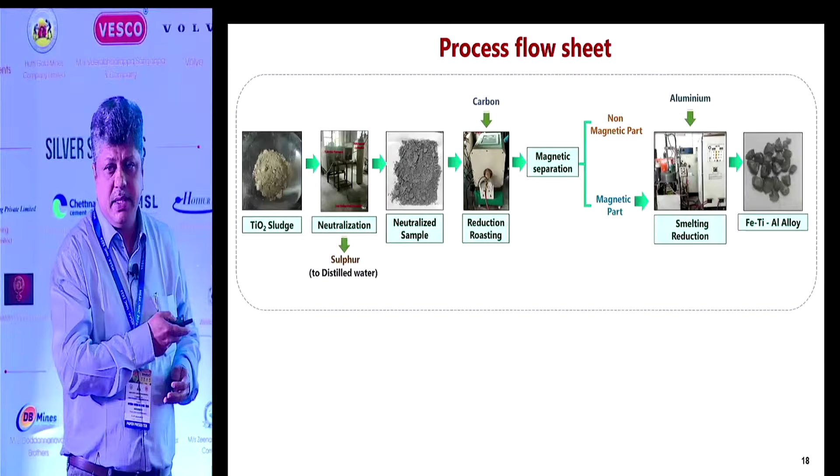What we did here, again with the red mud - this is a sludge, titanium plant sludge also. We produce the ferrotitanium alloy because these sludges contain some sulfur, so the industry is not able to use these sludges directly. We converted it into the useful product of ferrotitanium alloy, and these are the conditions we used.

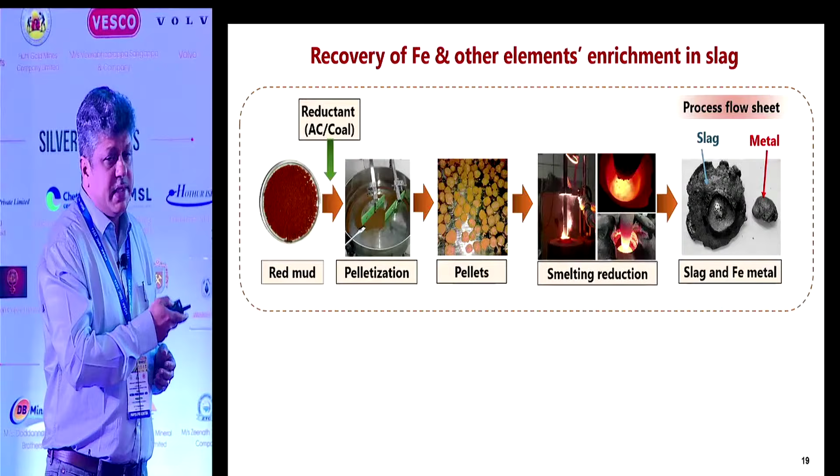With the red mud, what we did is initially take out the iron, which is the maximum content present in the red mud, and we use this slag, as the titanium and rare earth are enriched in the red mud slag.

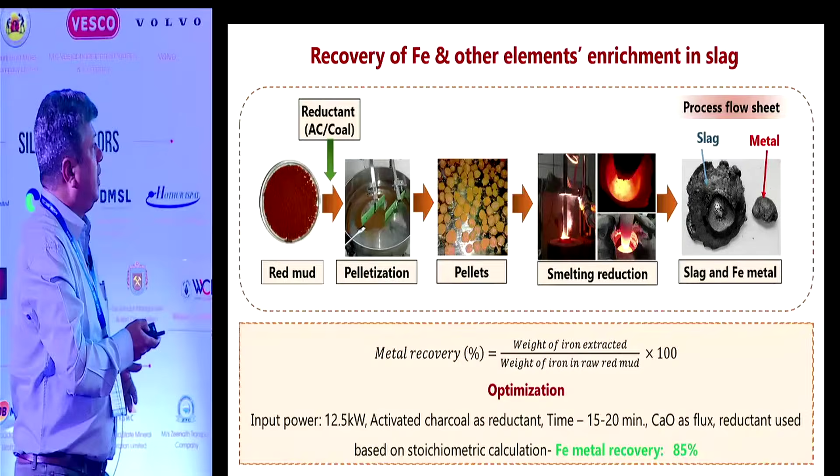Why did we use this process? Because most of the rare earth is associated with the iron. So when you use any type of beneficiation, magnetic separation or hydrometallurgical process, the rare earths will travel into the iron only. That's why we initially smelted and removed the iron in metal form. So most of the rare earths are concentrated in the slag, and iron is recovered separately. Then from this slag, we also process to get the alumina.

So this is also one way: whatever alumina is present in the red mud, it can be extracted easily. So these are some of the reactions and conditions we follow. And in the red mud, where I said rare earths are present, it is simple: you can do mild acid leaching and filtration, and you can enrich this rare earth precipitate.

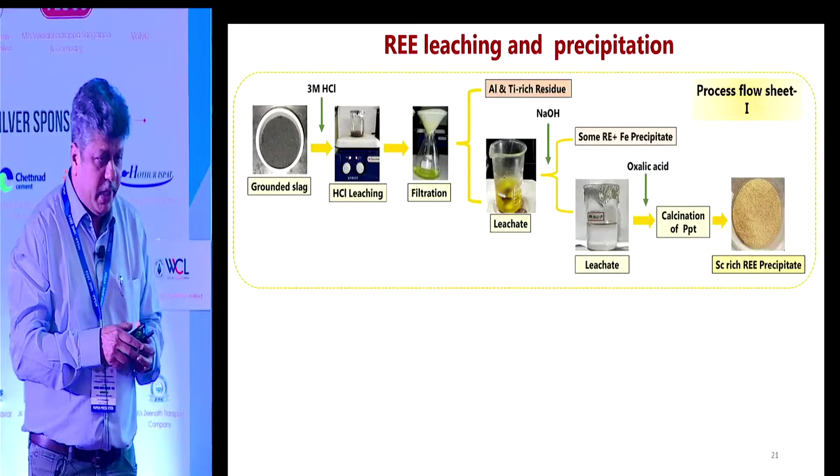But one of the important rare earth metals present in the red mud is scandium. The only source available in the world for scandium is in the bauxite sources, and it is available in the red mud only. Why is scandium important? Because it is used in many magnets as well as fuel cells, an advanced EV requirement. But the cost: even 1 gram of scandium metal costs 50,000 rupees. We cannot even compare it with gold. So such high value metals are present in this type of industrial waste.

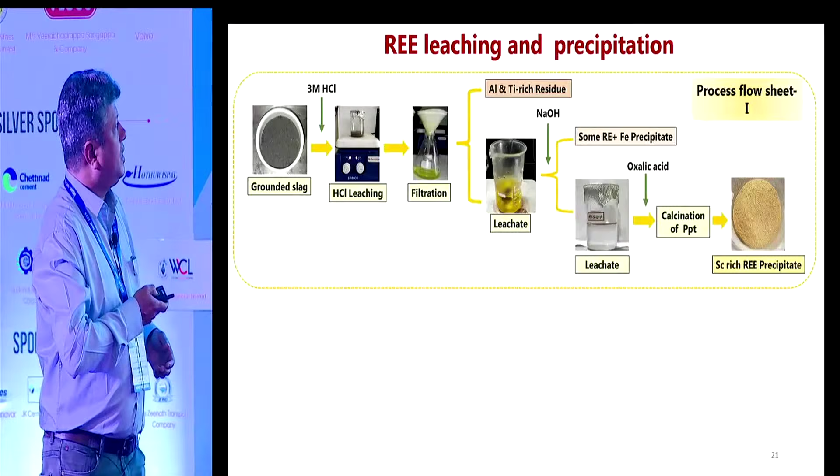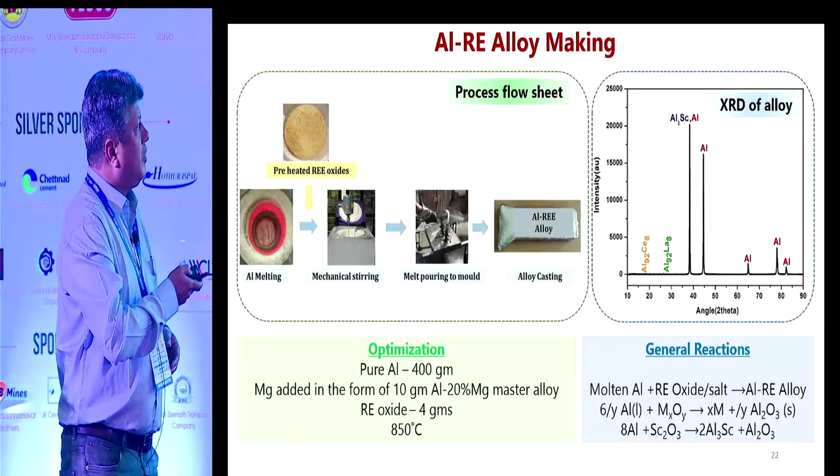And we also developed another process where you can enrich titanium oxide for titanium extraction. And another important point, as I said, it is not only enrichment or extraction; another step is you have to go to the product level. One way, we made an aluminum scandium alloy, which defense usually uses for their applications, improving the strength of the aluminum alloy. So these are some of the processes we optimized to produce this alloy.

And the next step, what we did: as I said, from the ore we enriched and beneficiated the scandium in the form of scandium oxide. From scandium oxide we converted it to metal. As I said, this is a very high value material compared to any other metal presently in the market. Even scandium oxide costs more than 1.5 lakhs per kg, but for scandium metal, 1 gram itself costs 40 to 50,000 rupees. So this we demonstrated at the lab level.

What I briefed here is the same methodology. It can be used for slimes as well as sludges, any type of mining waste; if you have any nickel, it can also be concentrated and extracted by this approach, as well as chrome tailings. We have found a lot of low grade chrome tailings and rejects also there. You can enrich and beneficiate them by this type of simple approach. And similarly vanadium or any other metals present in the sludges and wastes can be enriched and separated by this method.

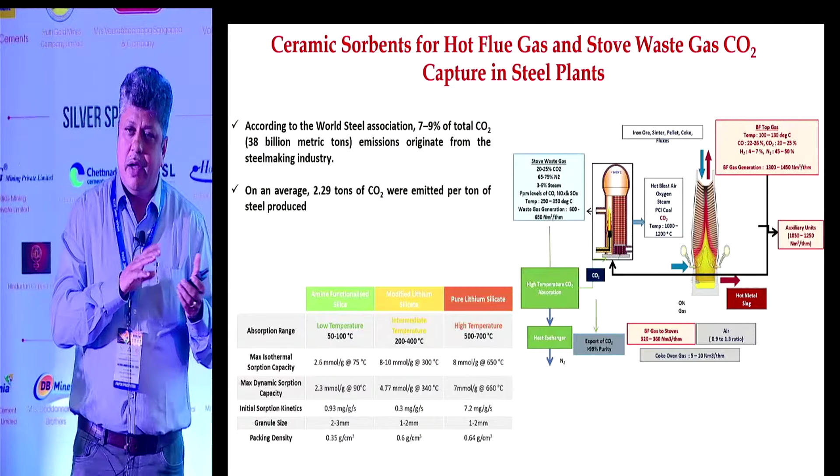And just giving another expertise, because I found some of the steel industries are also present here. As you know, carbon capture is one of the important topics, and a lot of industries are already working on that. In our institute, we have one pilot test facility. As you can see, the blast furnace has different types of gas composition. Nowadays a lot of material development is going on, and it is very difficult to test these gas compositions required for the blast furnace.

So what we did, we made one reactor in our institute. This is the pilot bed test facility. Any type of gaseous absorption, reduction or reducibility can be tested with a large amount of your sample. This is the first time in India we created this facility. So you can have different reducing conditions.

You can study the different types of... Five minutes left. Yes, sir. I have 1 or 2 slides.

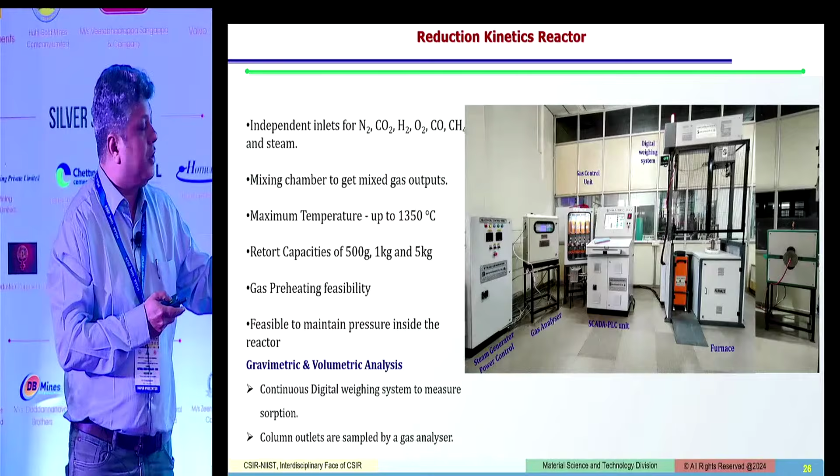So this is one unique facility available. Anyone interested in using and understanding the real gaseous environment generated in your plant, it's the same. We can develop this mixing of the gases, and the test bed is there. You can test all the conditions using this mixture of gases. And these are the different types of reactor vessels we have, and we have a control unit furnace.

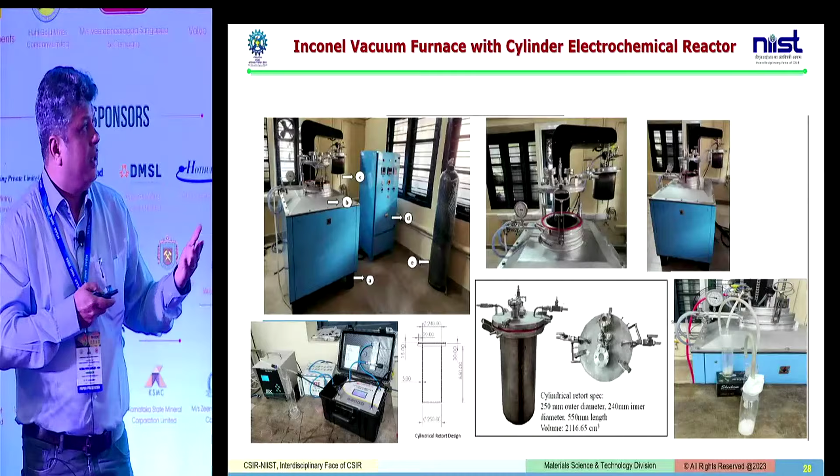This is actually required for pyrolysis, suppose if there are any sludges having sulfur, phosphorus or any other acidic contents. We try to distill and condense that sulfur using this facility. And this is one important facility. It may not be immediately understood, but now fly ash or any other industry waste, suppose critical metals are at a very ppm level,